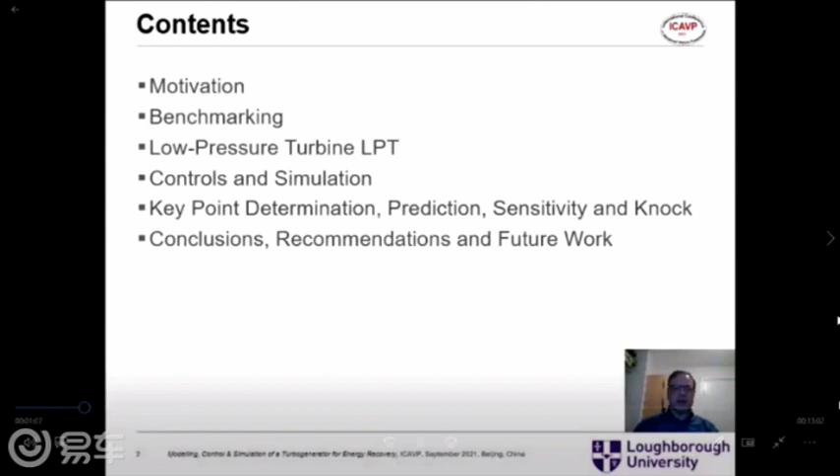For controls and simulation, a simplified SISO or single input, single output controller is developed in 1D simulation and in co-simulation. The simulation is performed at steady state as well as in transient operation. Finally, conclusions and recommendations are presented.

Motivation. Looking at a typical Sankey efficiency diagram, it can be seen that the ICE or internal combustion engine does not have more than about 35 to 40% peak efficiency. This inefficiency is manifested as waste heat, some of which can be recovered. The amount recovered depends upon pressure loss from the muffler to tailpipe, TG efficiency and back pressure impact. Better system efficiency implies more zero emissions kilometers for HEV applications.

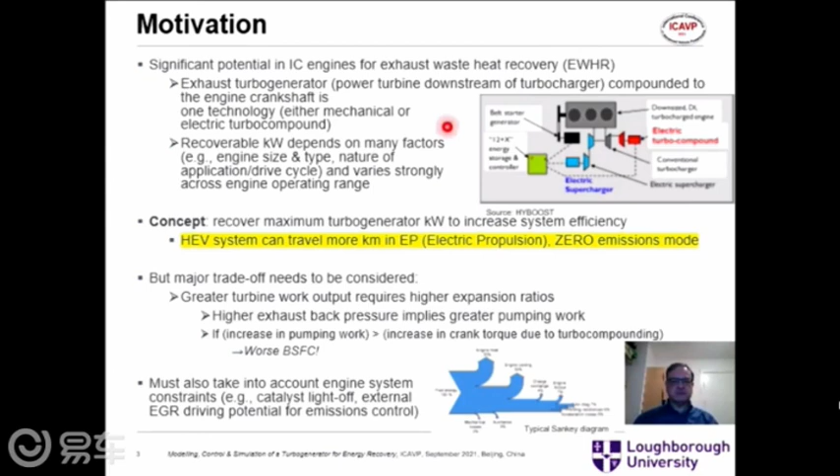Further motivation. The basis of this work is to use the LPT developed by Imperial College in collaboration with Ford and to estimate what the benefit would be on a drive cycle, in this case the NEDC or New European Drive Cycle. Reference paper is supplied for background reading.

The simulation study targeted a 2-litre gasoline engine and used steady-state vehicle calibration data to calibrate the simulation model. A simple SISO single input, single output controller was built to demonstrate the benefits. An initial key point analysis was used with a sensitivity analysis and a knock assessment, followed by a full co-simulation using WaveRT and Simulink.

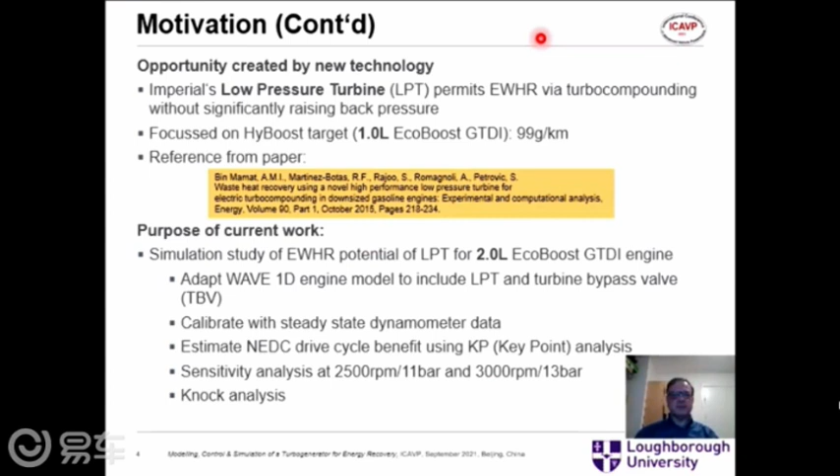Benchmarking. There is a range of devices available. Heavy duty or HD applications, for example, Bowman Power, use a TG device. The use cases are more steady-state motorway driving with minimal transients. Some turbo compounding cases, like Scania, where the TG device is mechanically coupled to the crankshaft.

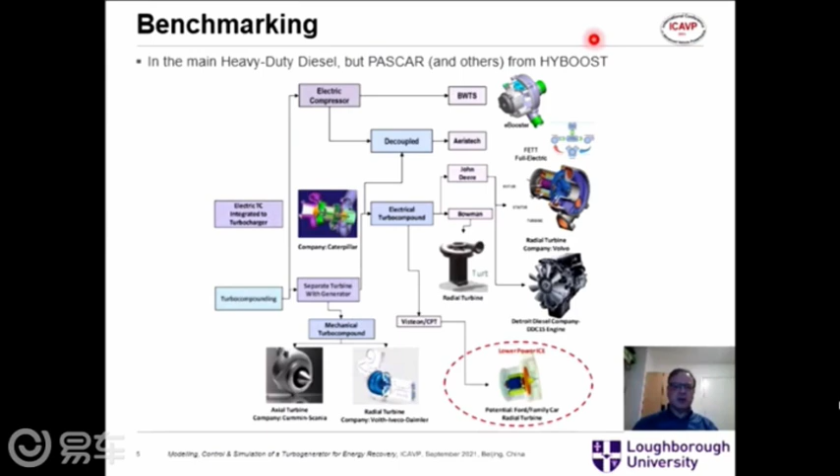For passenger car applications, the usage is more limited. For example, the Valeo CPT Tigers recovery system or the decoupled Aeristech solution, which has no mechanical shaft linkage between the turbine and the compressor. Finally, electrified turbochargers, for example, Borg-Warner turbocharger systems BWTS, have e-machines directly integrated into the device, permitting a shifting of operating point in order to recover electrical power.

LPT location. From the full engine mapping, thermodynamic power can be calculated downstream of the conventional three-way catalyst, which is the best location for a TG since catalyst light-off is not compromised, and the device can be bolted on as an aftermarket device, for example. The calculation of the thermodynamic power is shown.

Engine dynamometer mapping data is shown here, and for example, the maximum pressure post-catalyst is 1180 hectopascals at 6,500 RPM.

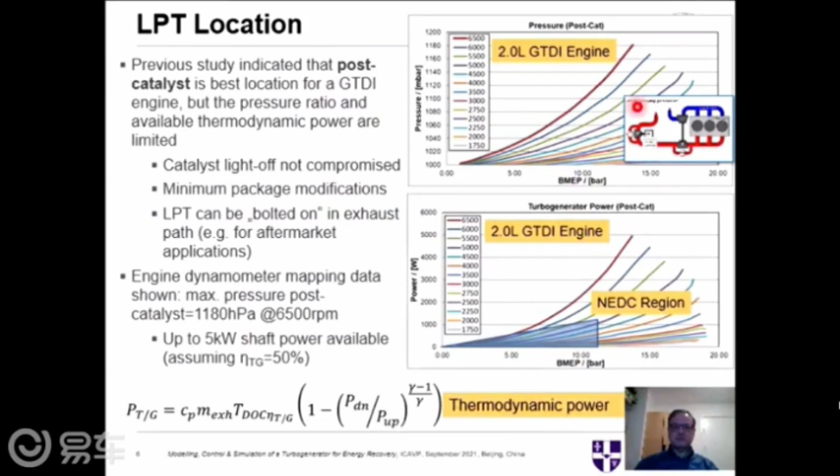Low pressure turbine. The LPT is optimized at low pressure ratios, for example, in this range 1.05 to 1.3. Its peak efficiency is high, being about 70%, and the efficiency map is shown from a prototype build at Imperial College, which was tested on an engine.

It turns out that around 1 kilowatt for the HyBoost 1.0 litre EcoBoost GTDI engine was available, and this led to a 2.4% BSFC reduction at peak torque. But the question remains, can the LPT power be increased without compromising system BSFC?

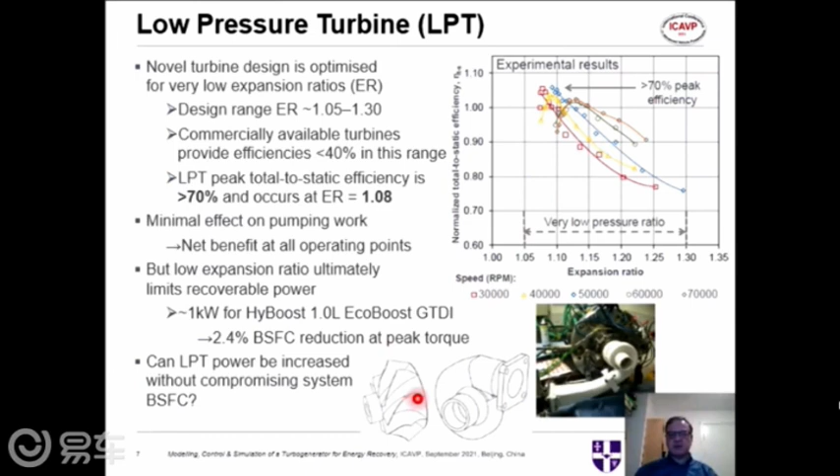Model layout. The simulation model was developed in Ricardo Wave. Some of the model parts include the throttle controller, which controls the BMEP or the engine torque, the TIP or throttle inlet pressure controller, which uses the wastegate to control the intake manifold conditions.

Connected downstream of the conventional turbocharger wastegate is the LPT plus the wastegate, and the low pressure turbine wastegate control controls to a pressure ratio set point of 1.15.

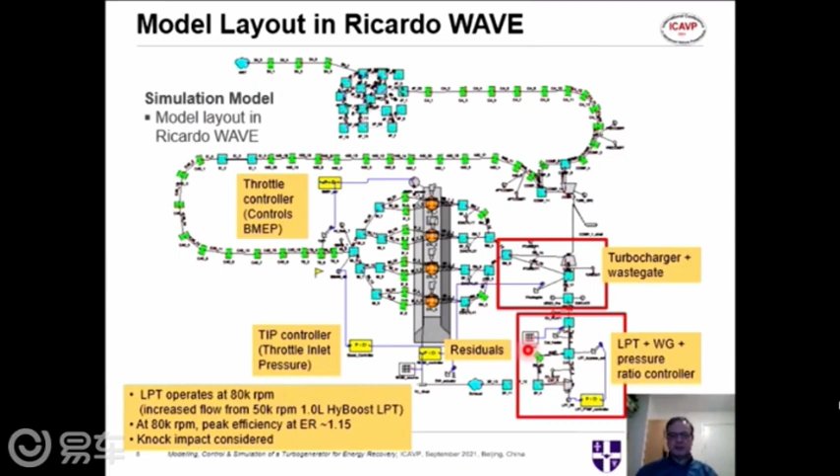Key point determination and results. The key points are based on drive cycle residency determination and are used to predict the possible energy recovery. Key points are listed. Altogether there are 16, and number 16 is, for example, 2,500 RPM and 11 bar. So this is the most highly loaded point. It turns out this point alone gives a 2.3% fuel consumption improvement.

A generic controller would keep the TBV fully open until about 1750 RPM or 7.5 bar BMEP, since there is only a small amount of energy recovery possible. This would be a control system requirement.

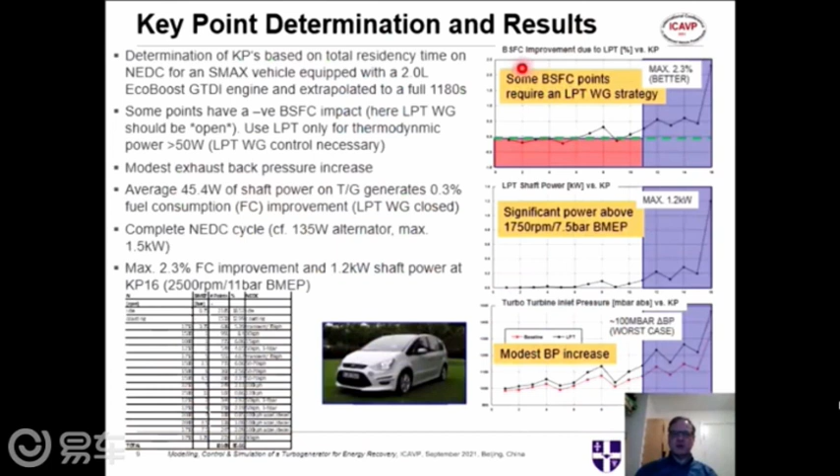Key point sensitivity. In this case, 2 operating points were selected which are non-NEDC and are more representative of real-world conditions. Then there was a sweep of the low-pressure turbine bypass valve from fully open to fully closed.

It can be seen, for example, at 3000 RPM 13 bar BMEP, that in theory we could recover up to 3.6 kilowatts of thermodynamic power, but there is a small increase in back pressure, and this needs to be traded off against other system requirements.

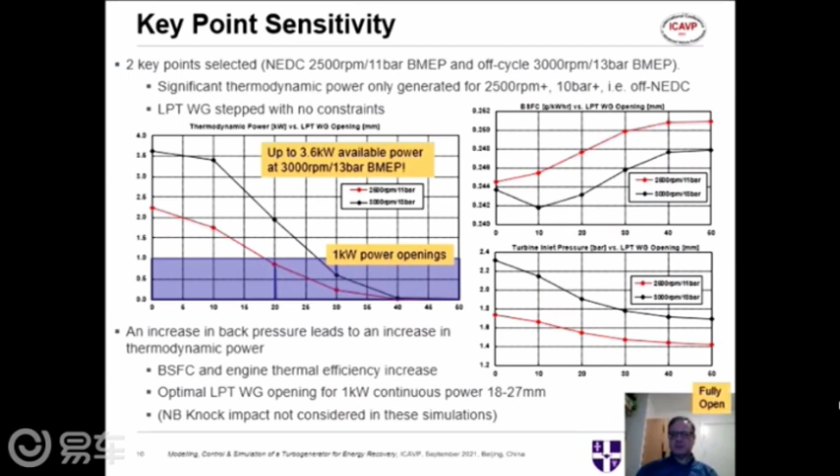Knock assessment. The knock assessment is based on Douaud and Eyzat metric as a function of the unburned fuel mass. 3000 RPM 13 bar and also 2500 RPM were selected as key operating points. In summary, there is no significant knock risk.

It can be seen that at 3000 RPM and 13 bar there is a very small amount of knock intensity, which is effectively insignificant.

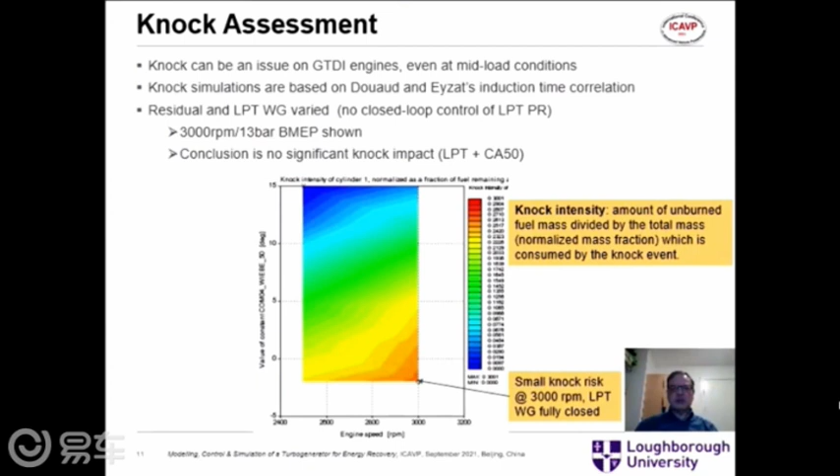Co-simulation in real time on the NEDC. The co-simulation of the turbogenerator controller was performed on the NEDC drive cycle. There is good closed-loop control of the MAP and brake torque, as well as the LPT pressure ratio. However, the LPT opening was limited to 10 mm opening.

The baseline results are in good agreement with real-world vehicle measurements, and so is the key point method. A summary of the results is shown, and it is indicated that the low-pressure turbine fuel consumption improvement over the whole cycle for maximum energy recovery equates to about 280 watts of thermodynamic power, and that is the average over the whole drive cycle.

Finally, there are some cases to improve the energy efficiency further. On vehicle deceleration, the LPT TBV is fully closed.

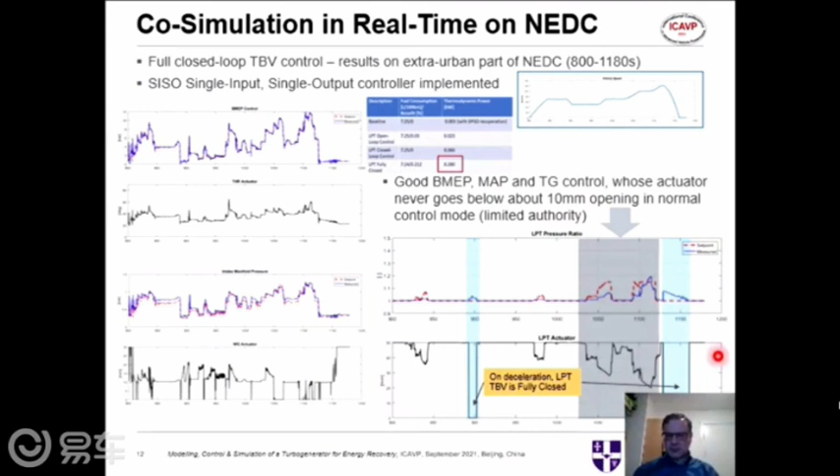Summary of potential benefits. As a summary, the potential benefits are listed here. The main one is the fuel consumption benefit, which requires a capable transient controller. Further enhancements include VCT or variable cam timing, calibration modifications, and the interaction of the LPT turbine bypass valve with the conventional wastegate, which suggests a more advanced controller architecture is needed. There are no serious knock issues.

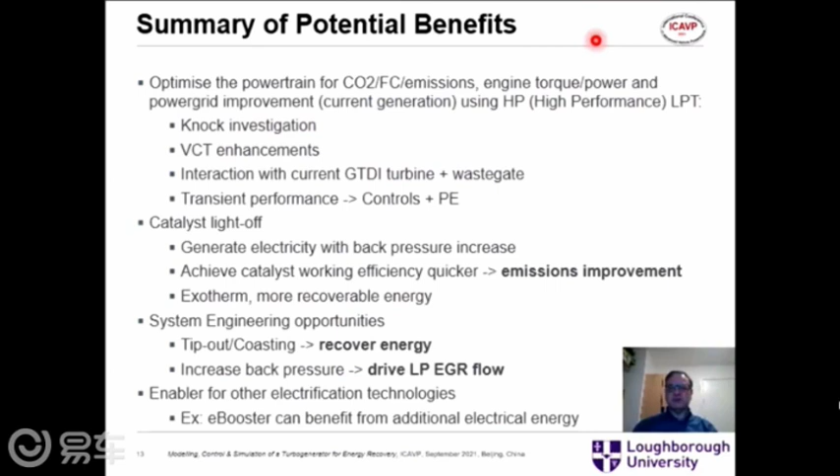Catalyst light-off can be improved with the dual benefit of recovered energy and the possibility to drive external EGR where available. Conclusions and further work. It has been demonstrated both in steady state and in transient control that the LPT system can give a fuel consumption improvement. However, more calibration and optimization is required to harness the full potential, which can include VCT enhancements and the interaction of wastegate and LPT TBV.

The NEDC is a low load drive cycle where the overall benefits are small, but from key point analysis, a higher loaded drive cycle like the current WLTC should yield more energy recovery possibilities. Future work revolves around building a more advanced multiple input, multiple output controller to take advantage of the system interaction. Although a physical prototype of the TG was built for a small engine, an enhancement would be further hardware optimization and engine testing on this device.

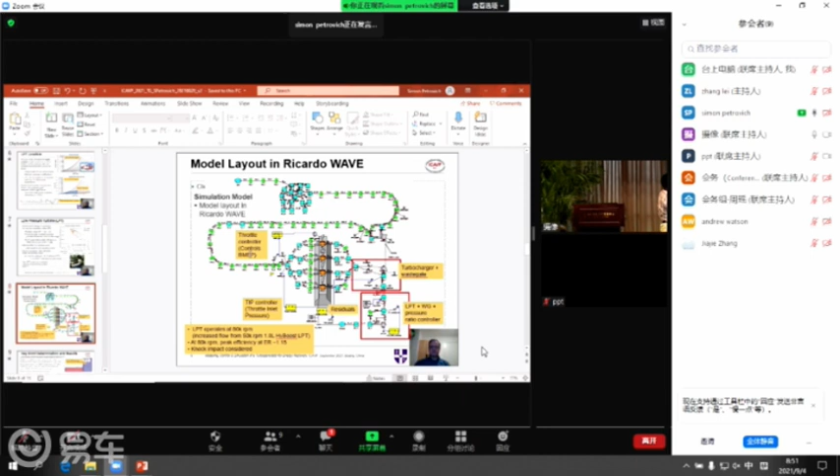So it's basically contained with... This doesn't show the whole co-simulation, but this slide shows basically the layout of the model in the Ricardo Wave part. For the co-simulation, we've taken out the controller part, so the throttle controller, the throttle inlet pressure controller, and also the bypass valve controller for the turbogenerator. That's been taken out and put into Simulink. So the 1D modeling is contained within Ricardo Wave, and then the control part and the calibration

are in Simulink. So things like the settings for the set points, like the air path settings, like the manifold air pressure set point, or the burn rate for the combustion, are actually calibratable within Simulink. That used the steady state dynamometer calibration for that particular engine. So this method is really very generic. It doesn't have to be just this engine.

Okay. So that means the core part of the system is generally based on a static empirical model, am I right? Or does it also contain some physical models like the burning, or the fluid dynamics process? Yeah, that combustion process is included here. There are dynamics with the manifolds, for example. So you do get that dynamic air path, and also the heat transfer to the exhaust. So there are dynamics included there.

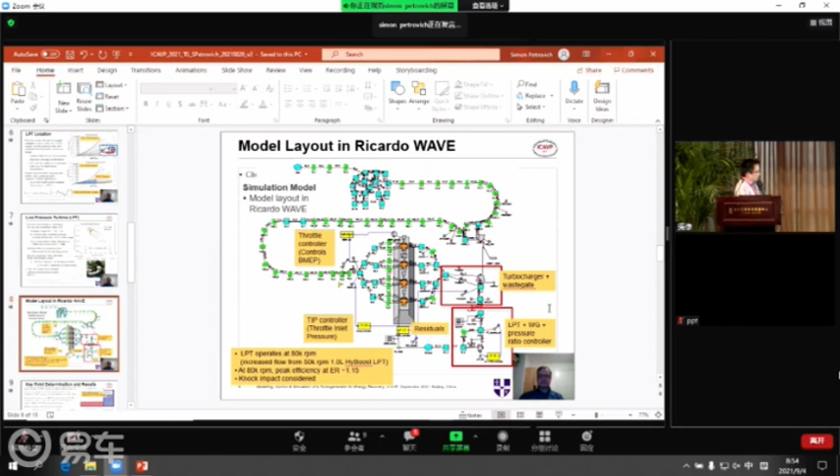Okay, clear. Thank you. One more question is about Ricardo Wave. Is it a specific software developed by Ricardo, or some other platform? Yeah, it's a commercial package. The basic software is called Ricardo Wave, which is just this environment here. But then you also have Wave RT, real time, where you can do the co-simulation with Simulink. I don't have a slide for that, but it's possible to do that with an additional package within the Wave family called Wave RT.